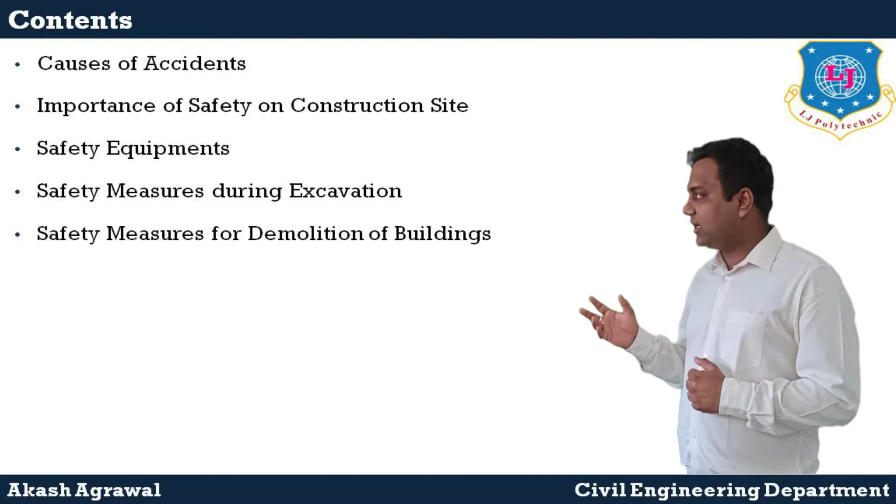In this video, we will discuss the subject Construction Project Management, and the topic which we will cover in this video is Safety Management. Let's start the session with the contents. The contents are causes of accident, importance of safety on the construction site, safety equipment, safety measures during excavation, and the safety measures for the demolition of buildings.

Let's discuss the first topic, that is causes of accident. Here we have listed the causes of accidents according to their nature. First is planning and organization. In planning and organization, the causes of accidents are such as defects in the technical planning, fixing unsuitable time limits, assignment of work to incompetent contractors, and insufficient supervision of the work.

Second is the execution of the work. Causes of accident in this are construction defects, use of unsuitable materials, and defective processing of materials. Third is equipment. Causes of accident in this are lack of equipment, unsuitable equipment, and defects in equipment. Next is management and conduct of work. In this, causes are inadequate preparation of work, inadequate examination of equipment, unskilled operatives, and inadequate supervision.

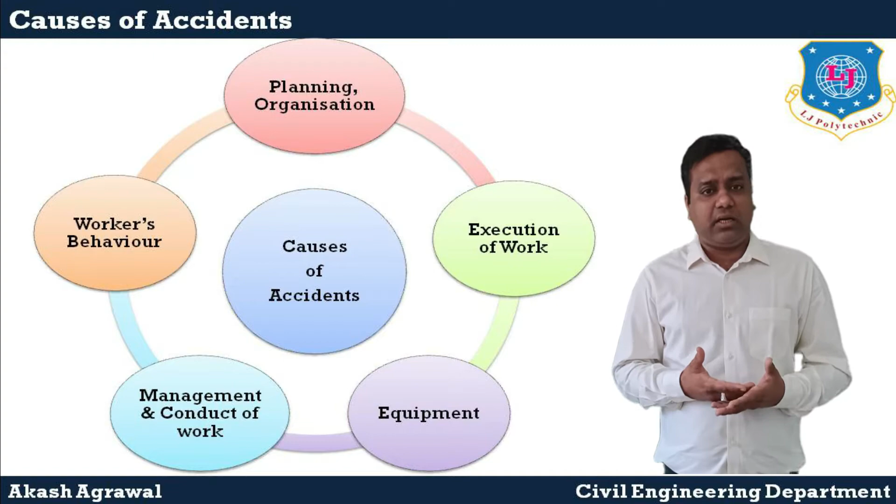And the last one is workers' behavior. In this, such as irresponsible acts, unauthorized acts, and carelessness.

Let's discuss the next topic, that is the importance of safety on the construction site. The construction industry, employing the largest labor force in the country, has accounted for about 11% of the occupational injuries and 20% of all the deaths resulting from occupational accidents. The cost of accidents is expensive. However, economic cost is not the only reason for which a contractor should be conscious of construction safety.

The reasons for considering safety include: first is humanitarian concern. When an accident happens, the resulting suffering of the injured workers and their families is difficult to quantify in economic terms. The contractor should never ignore this even if he has insurance against accidents.

Second is the economic reason. Even if a contractor has insurance, he will find out that the cost of accidents will come out of his own pocket through an increase in insurance premium. In addition, there are indirect costs that result from the accidents.

The direct costs can be the medical care expenses for the injured, workmen compensation, increased insurance premiums, fees for legal counsel, etc. The indirect costs can be slowdown in operation, loss of client's confidence, administrative work associated with the accidents, etc.

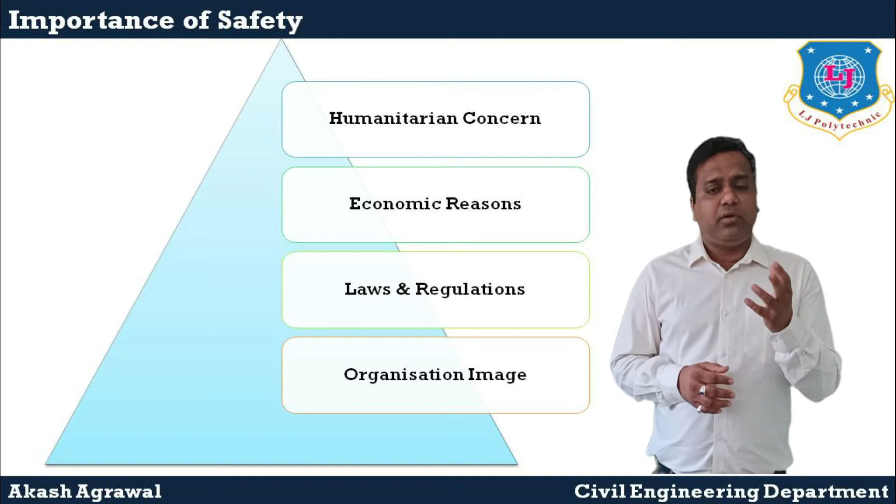Fourth one is the organizational image. A good safety record can produce higher morale and productivity and stronger employee loyalty. It will also improve the company's public image and therefore make it easier to acquire negotiated jobs.

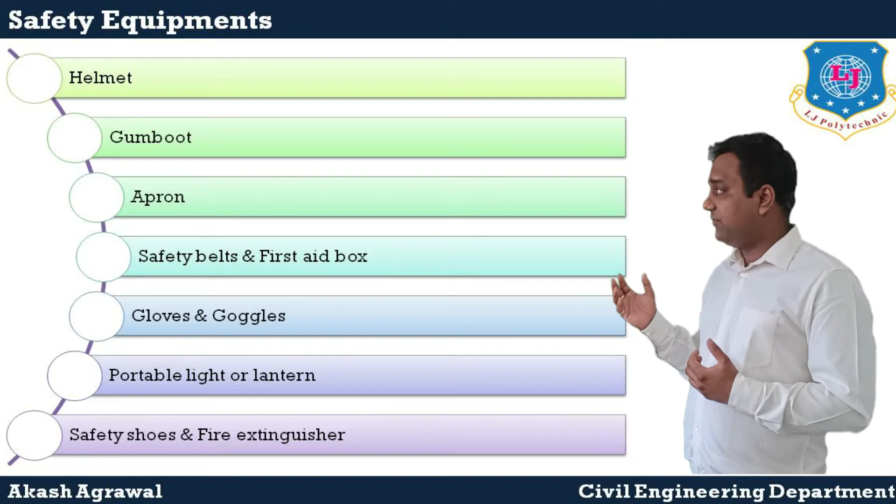Next topic is safety equipment. There are some safety accessories which must be used by the workers while performing particular jobs on a project. This reduces the accident hazards to a great extent. The various safety equipment used are helmet, gumboots, apron, safety belts, first aid box, gloves and goggles, portable light, safety shoes and fire extinguisher.

Now, let us discuss another topic, that is safety measures during excavation. The first safety measure is that an experienced foreman or supervisor should look after the excavation work. Complete knowledge of underground structures is required to prevent accidents. Safety helmets should be worn by all persons entering a trench. Trenches should be securely shored and timbered for a depth exceeding 2 meters.

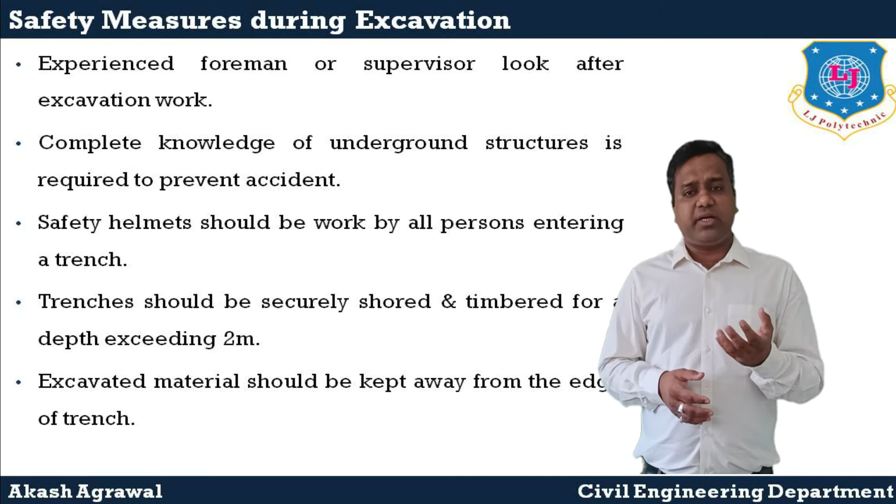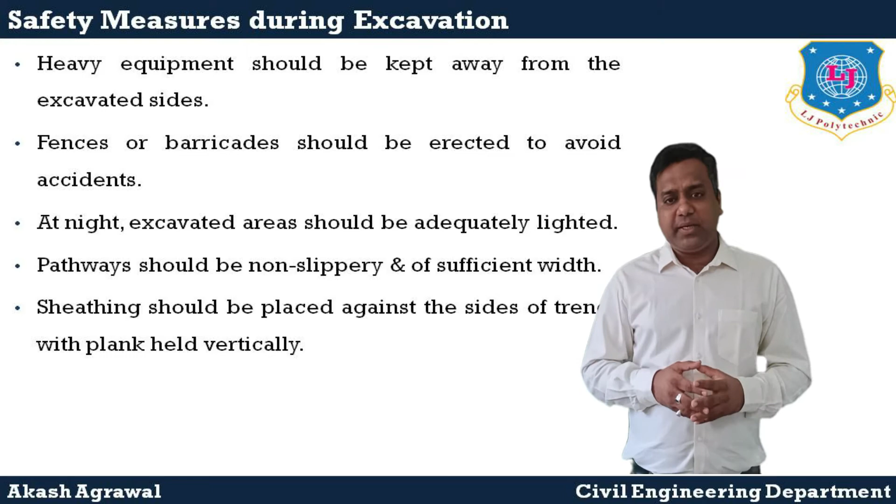Excavated material should be kept away from the edge of the trench. Heavy equipment should be kept away from the excavated sides. Fences or barricades should be erected to avoid accidents. At night, excavated areas should be adequately lighted. Pathways should be non-slippery and of sufficient width. Sheeting should be placed against the side of the trench with planks held vertically.

Next topic is safety measures for demolition of the building. The first safety measure is that danger signs should be provided all around the structure and doors giving access to the structure. Second, during night time, red lights should be placed around the barricade and entry of unauthorized persons should be restricted. Workers should use all the safety appliances or accessories. If any danger is anticipated to the adjoining structure, it should be vacated.

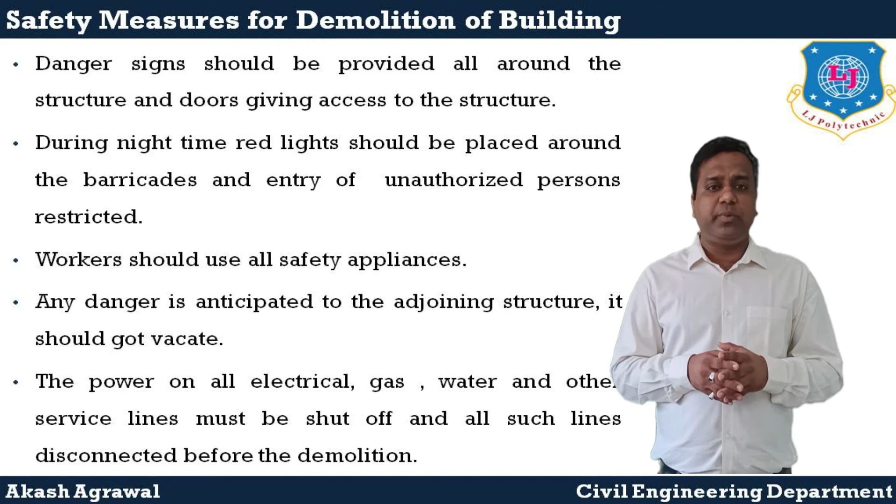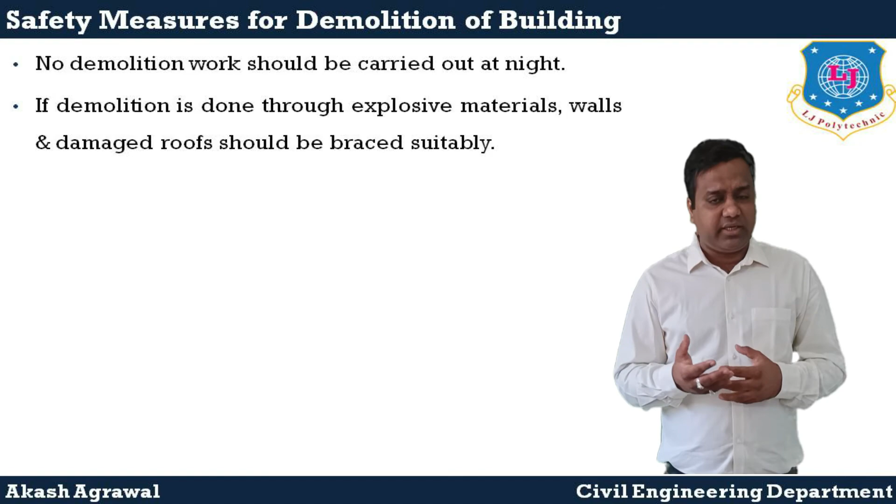The power of all the electrical, gas line, water line and other service lines should be shut off and all such lines should be disconnected before the demolition starts. No demolition work should be carried out at night. If the demolition is done through explosive materials, walls and damaged roofs should be braced suitably.

So we conclude our session here. I hope in this video you all have understood the basic idea about safety management.